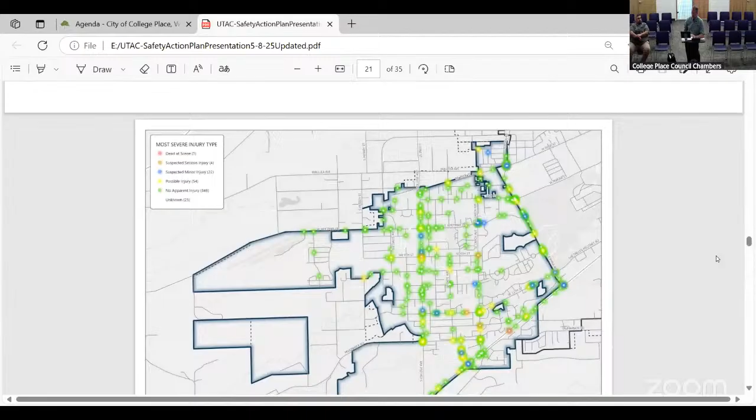So there are several pages after these two that have maps and data we used to assign points for each of those categories. I don't think I'm going to walk through all of these, but this just shows the total collisions. You can go to the next one. This shows the daily traffic volumes on each road segment.

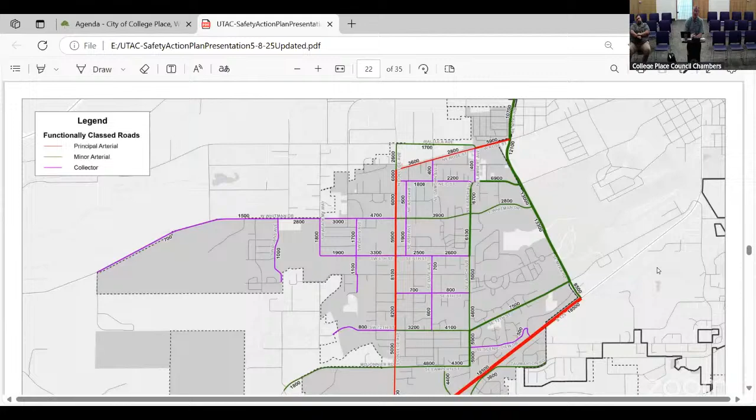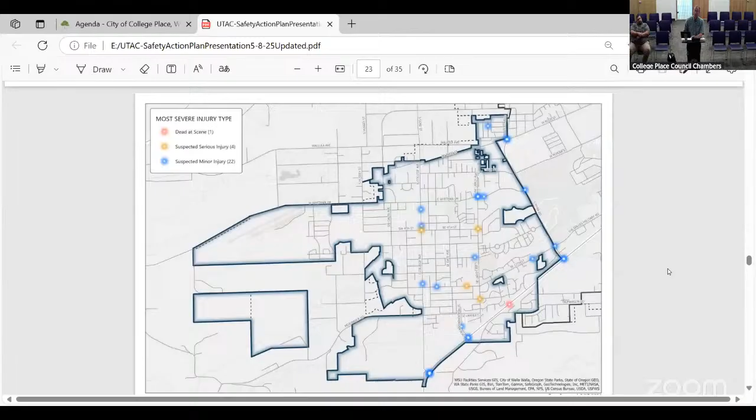The next one shows where the fatalities and serious injuries are, in red and yellow, and the blue ones are injuries that aren't serious. Then the next one shows the accident rates, and those rates are per million vehicle miles on segments, or per million vehicles entering an intersection.

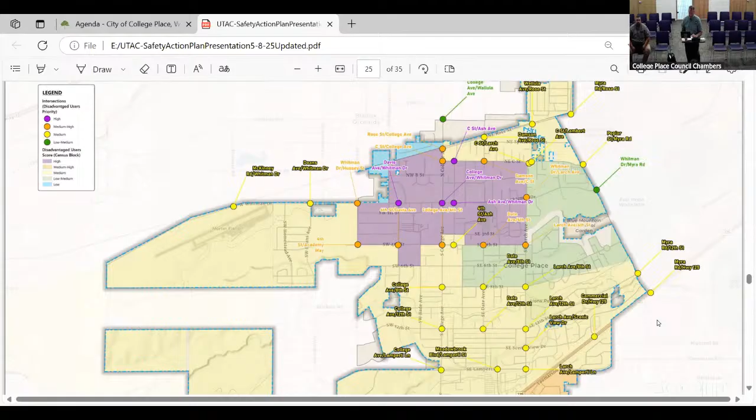The next one shows the demographic characteristics, a summary of all the different categories that were combined. Those categories were listed at the bottom of those earlier tables as well. That one is for intersections, and this one is for road segments.

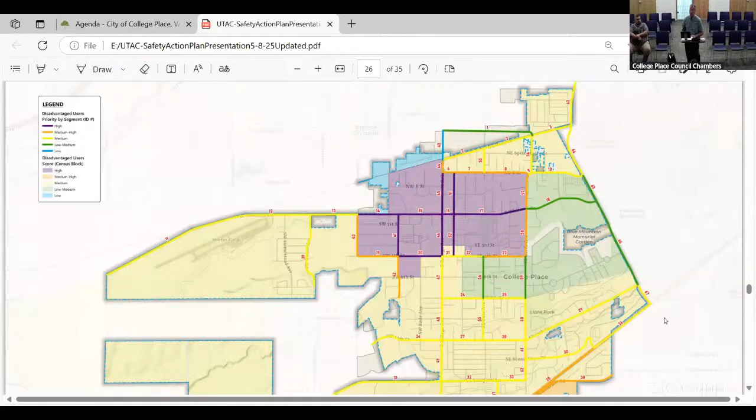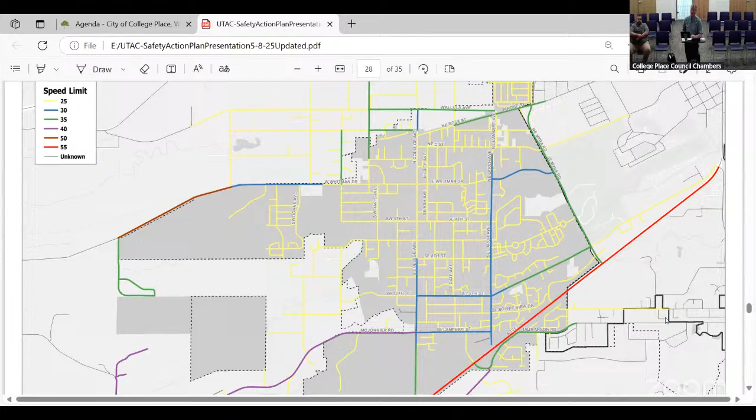The next one shows the public comments we received. Then the next shows the speed limits on different roads, and the next shows the sidewalks and where those are at. The next one shows safe routes to school, then school zones, and after that, the transit routes.

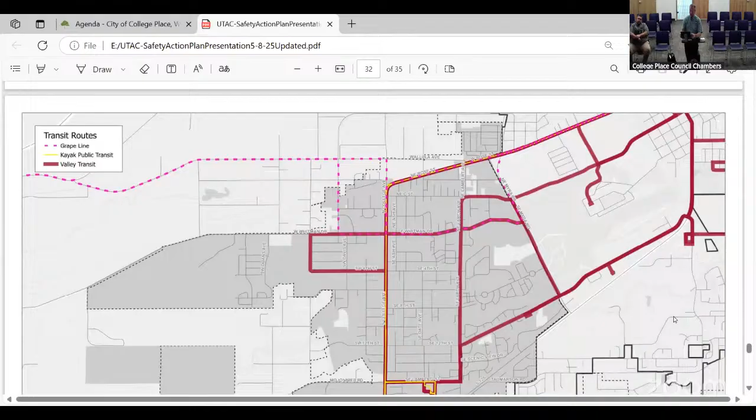We did take some things to the public in the first half of April. We didn't get a lot of responses, but there were a couple of questions I thought we'd share here.

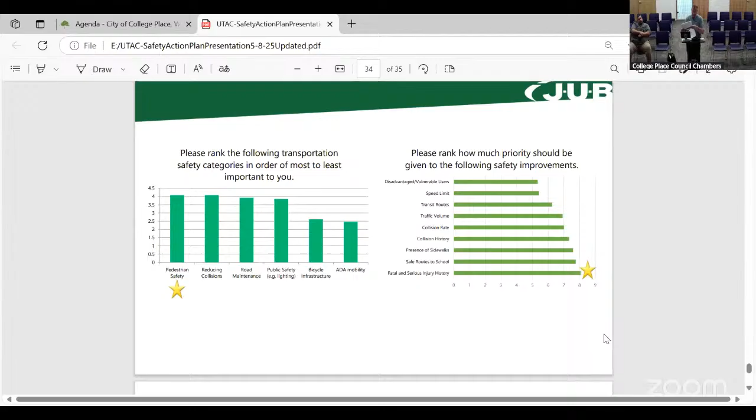On the right, we asked people to rank how much priority should be given to these different kinds of safety improvements—these are the same criteria we used in that prioritization. They thought the highest priority should go to fatal and serious injury history, then safe routes to school and presence of sidewalks—I think all of those are important. Interestingly, though, probably the most important one of all is speed. The faster cars are going, the more likely someone is to get hurt. All right, so that's what I had sent to you last Friday.

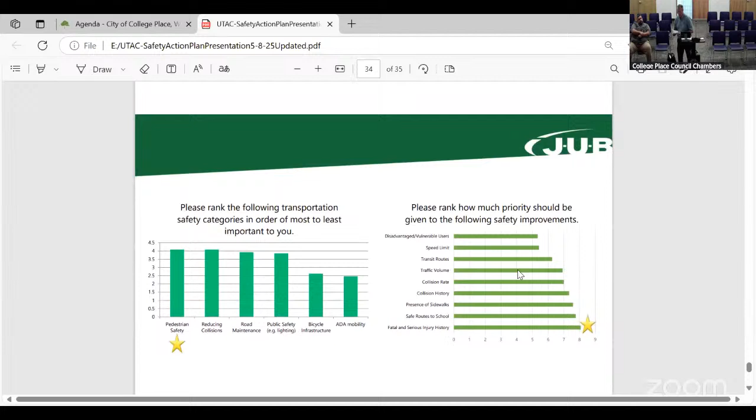This page that I'm handing out, I put it on the city website. I just forgot to attach it to the end of the presentation that was sent last Friday. Oh, the updated file does? Oh, interesting.

Excuse me, could you, we couldn't hear you when you were walking around handing things out. So could you let us know what you handed out? Yeah, and I thought I had a file with some updated materials.

I apologize that I can't hand this to you. On the project website on the city's page, as part of the public involvement and outreach we did in April, this table here, we handed out, it's a list of projects identified from the public comments received last fall. The 430 some comments, we looked at those and tried to identify some low cost improvements that could be done - signage, striping, maybe even some vegetation trimming - things that could be relatively inexpensive and could help with collisions. There's, I don't know, 12 to 15 different projects here.

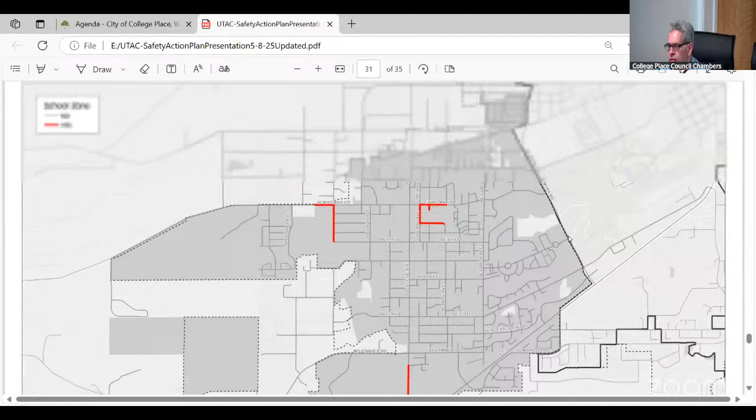I already asked my question, but I just want to go back to the table where you did the analysis and assigned points. Basically, my question was about funding, which you addressed. But how did you go about assigning points? I see here you have a metric, and next to it a point system. How did you go about assigning those points for each of the metrics?

Well, I won't say it was overly scientific. We gave 100 points in each category and tried to spread those out in a reasonable way. For example, on traffic volumes, we said once you're over a certain amount, you have the highest risk, and below that we spread it out on a proportional share. I think I set the maximum at over 10,000 vehicles, which made the math easy, though that wasn't the intent, it just seemed like a reasonable place. So any road with a higher ADT than 10,000 got all the points, and if you only had 1,000, you got 10% of the points in that category.

For collision rates, we just looked at what the ranges were and tried to say, is this twice as bad as a different one, then give it twice as many points. I know this isn't exactly a scientific way, it's just eyeballing based on prior experience. Then when it got done, we looked at it and asked, does this seem reasonable? Do the ones with the highest accident rates, highest number of collisions, and highest speed limits go to the top? And they do, and that seemed to make sense. We're open to suggestions, so if you want to send me some comments, I think we're open to that if you see something we missed.

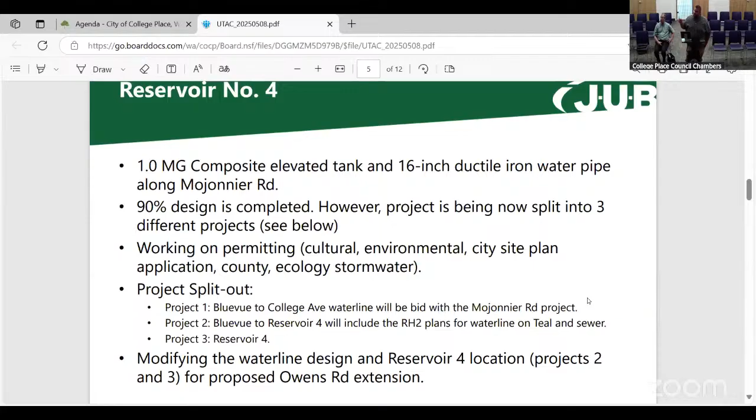We are modifying the alignment for the north-south portion of the water main to align with a proposed Owens Road extension. This shows a very conceptual alignment for a future Owens Road as a north-south collector road, and we're making sure our water transmission main aligns with this potential future route.

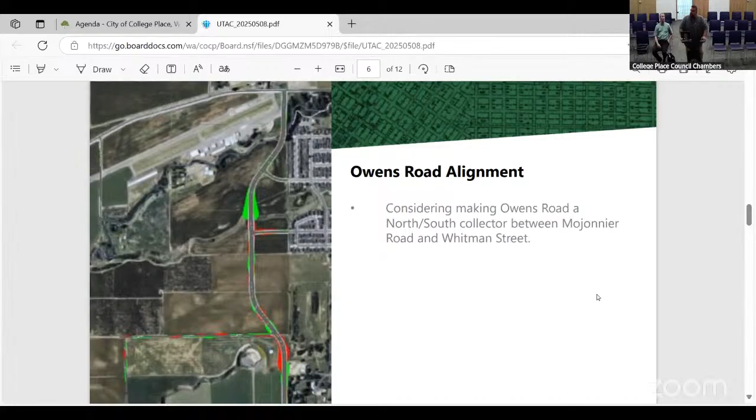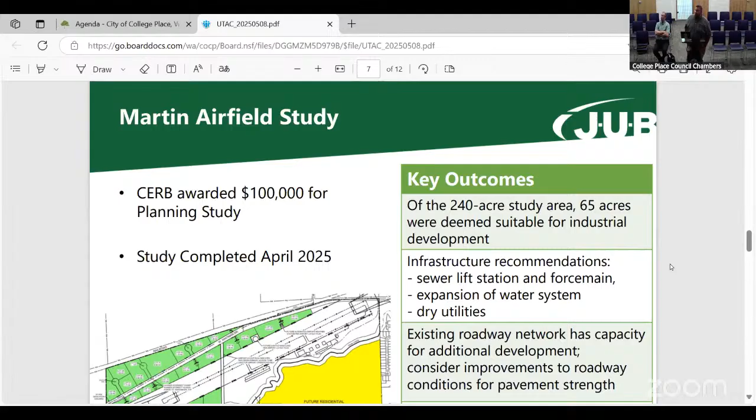We just wrapped up the Martin Airfield study, a $100,000 planning grant from CERB. On the 240 acre study, we identified about 65 acres suitable for industrial development out around Martin Airfield. We identified infrastructure recommendations for providing that level of service, including needing a new sanitary sewer lift station and force main to serve the area, and expansion of the city's water system. We also determined that the existing roadway network would have the capacity for that type of development in the future.

There was also a recommendation to establish an airport overlay zone for this area. This study is complete, and I believe the next step is to look for funding for some of the infrastructure improvements to serve this area.

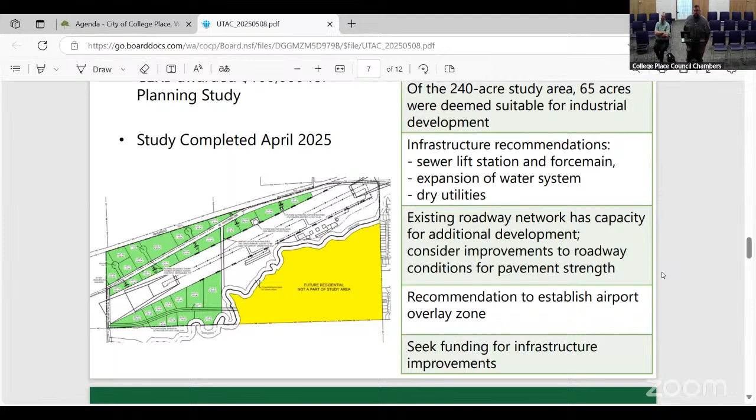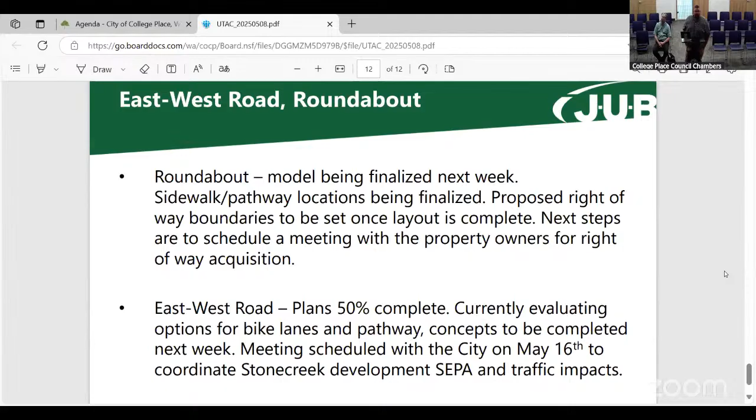Next slide. I think that's it. Yeah, so that was just a brief update of some of the projects we're working on. Helpful information. Let's get some feedback, observations, questions.

Commissioner Larson: No questions, thank you. Commissioner Williams.

When you said at Martin Airfield that airport overlay was recommended, what is that? I haven't worked on that project, so I'm not exactly sure, but maybe I can speak to it since I act as staff support for Economic Development Commission. Basically, that's a type of zoning that would allow the airport and then ancillary uses like light industrial business uses, airport hangars, and things like that. The quagmire out there at the moment is that we don't really have a zoning district in the city that allows airports. It's grandfathered in. We basically have it in as light industrial, but light industrial is pretty silent on the whole concept of airport. If you remember from the last time we went through the comprehensive plan, the new comprehensive plan is going to cover Martin Airfield, but the old one doesn't even address it because that's when the previous owner was going to pull it out of the UGA. So that's why it's a big deal to have this plan, because we have nothing on it. So it's basically a zoning designation.